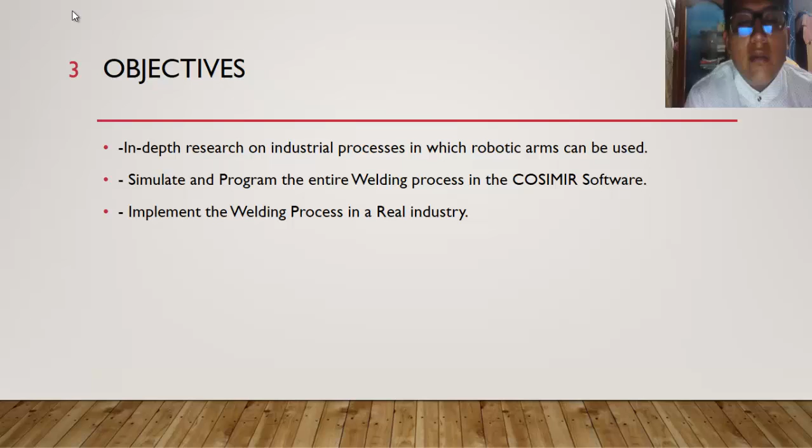Introduction. The welding processes in the automotive industry are constantly evolving from manual welding to automatic welding, that is from the first industry to the current industry, or Industry 4.0, as it is now, due to the evolution of production systems on the basis of a competitive environment and the economic and social development of industrial organization worldwide.

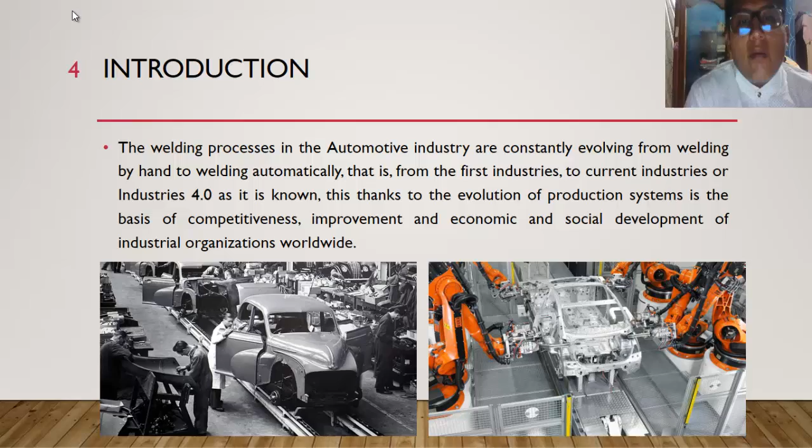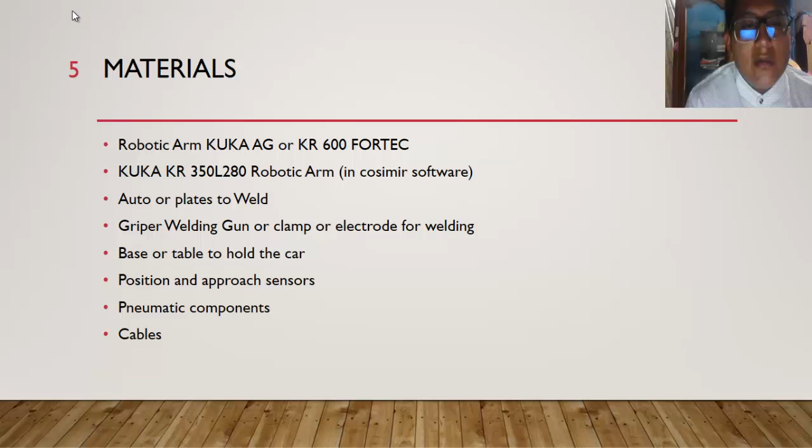The materials. The robots are KUKA AG, or KR 600 FORTEC, KUKA KR 350 L280 robots in Cosimir software. In this case, we use the KUKA robots to weld, a gripper welding gun or clamp or electrode for welding, a base or table to hold the car, position and approach sensors, pneumatic components, cables.

Theoretical framework. The KR 600 FORTEC. The advantages of the KR 600 FORTEC heavy-duty robots are obvious: powerful and intelligent technology guarantees consistently high production quality without extensive maintenance effort. Compared to previous models, the KR 600 FORTEC stands out with an even slimmer design. The design allows you to lift heavy components up to 600 kilograms in a minimum space.

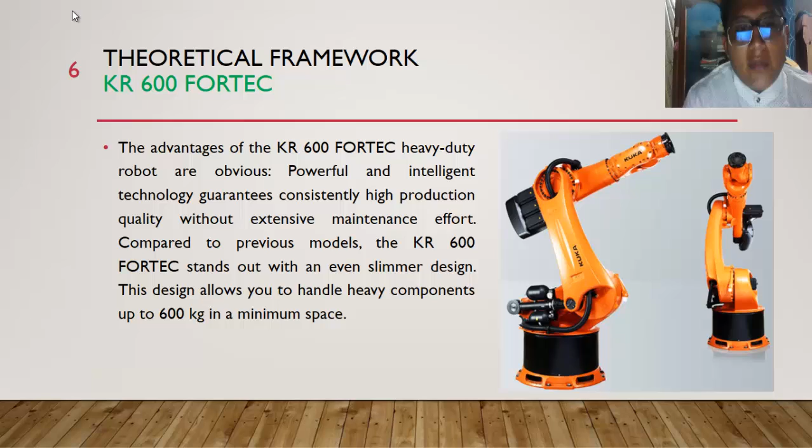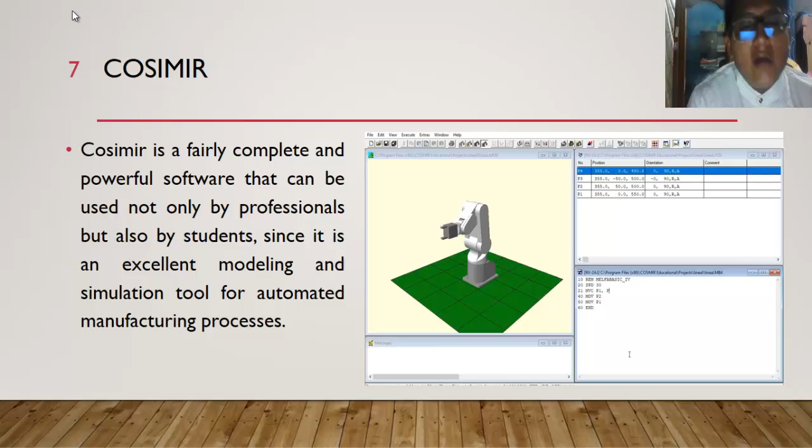The Cosimir software. The Cosimir software is a fairly complete and powerful software that can be used not only by professionals but also by students. Cosimir is an excellent modeling and simulation tool for automatic manufacturing processes.

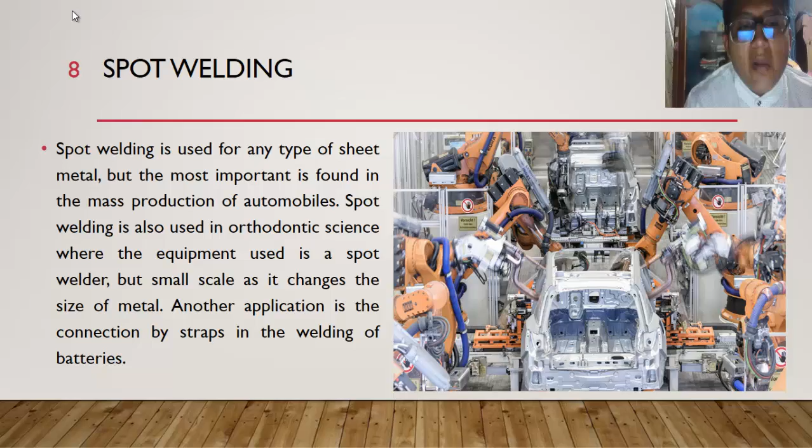Spot welding. Spot welding is used for any type of sheet metal, but the most important use is found in the mass production of automobiles. Spot welding is also used in orthodontics, where the equipment used is a spot welder, but on a small scale, changing the size of metal. Another application is the connection by strap in the welding of batteries.

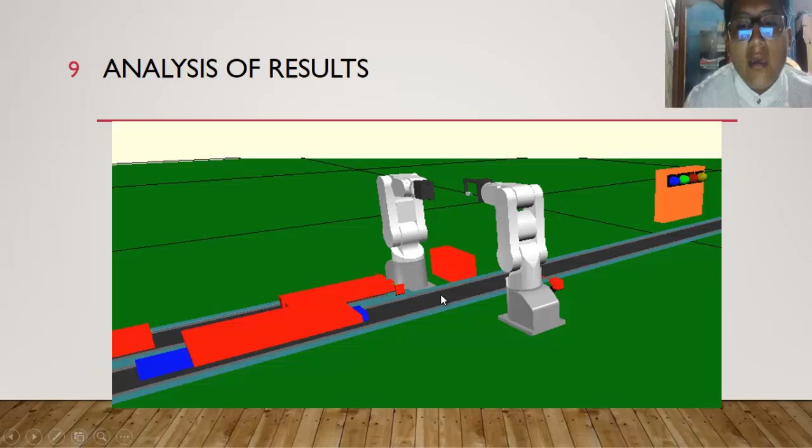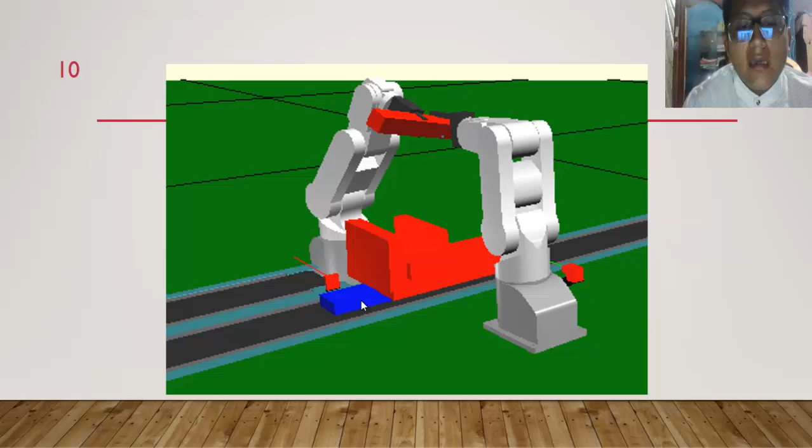Okay, analysis of results. We can observe the correct operation of the conveyor belt when it carries the material to the sensors, to later be manipulated by the first robotic arm. Okay, in this picture, here you can see the synchronized movement of the arm in charge of placing the device prior to welding.

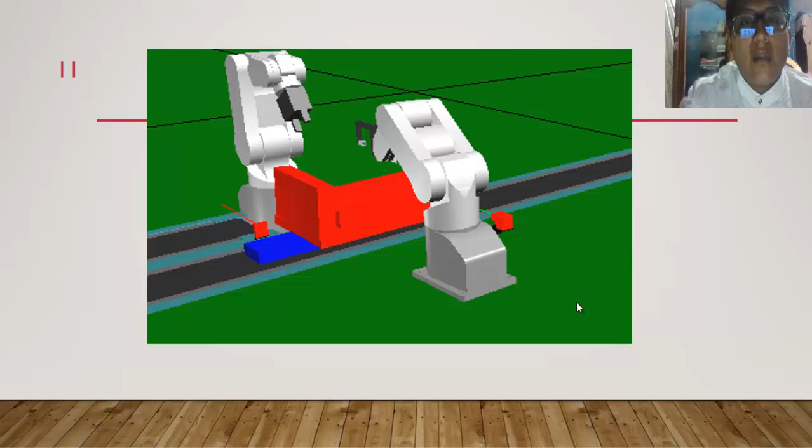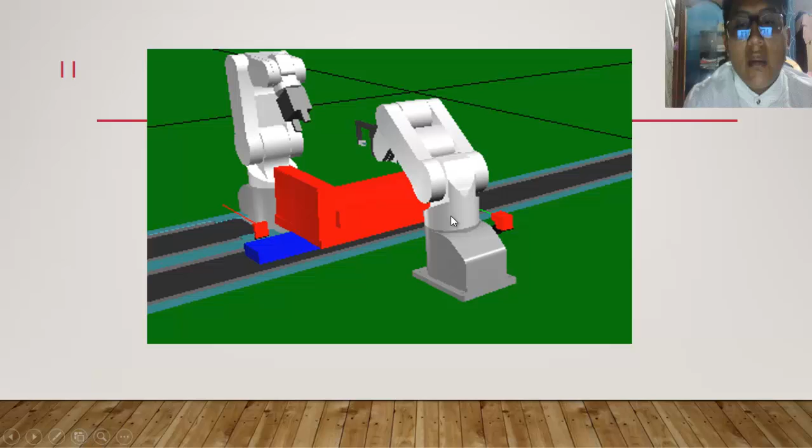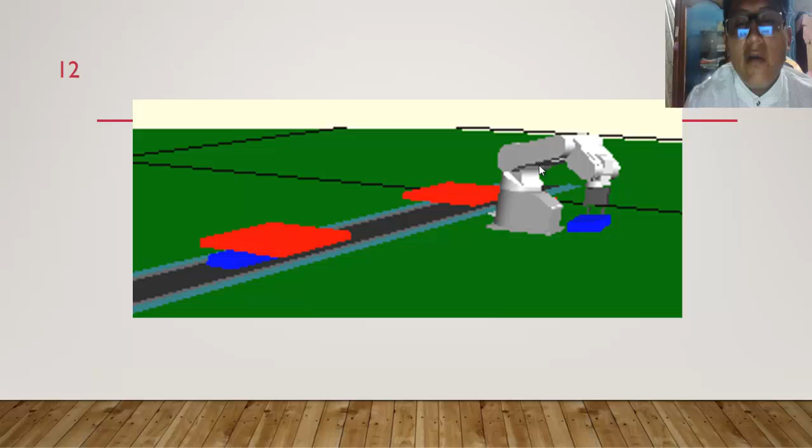Okay. We can see how the second arm performs the function of welding the parts. The process will be done twice. Finally, we observe that the conveyor drives the final product to another sensor, which detects it, and the third arm proceeds to remove the final product. The latter may be taken to a possible different process. Process completed.

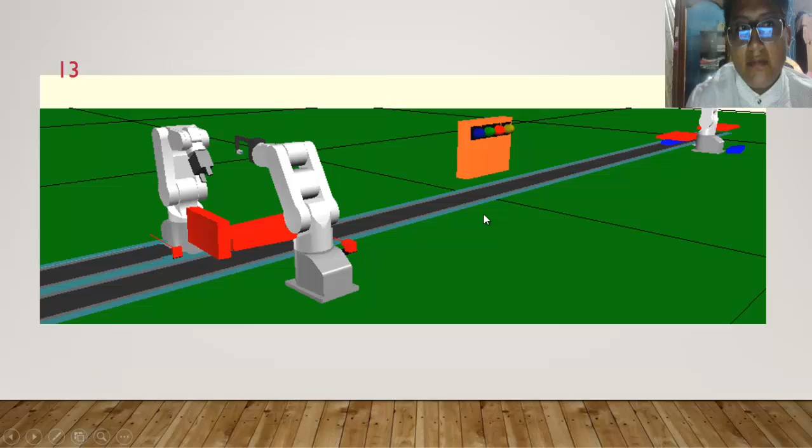Another problem was when building or designing the process in Cosimir, placing all the objects in different ways to be able to manipulate them in the software without risk of collision. Okay, in here.

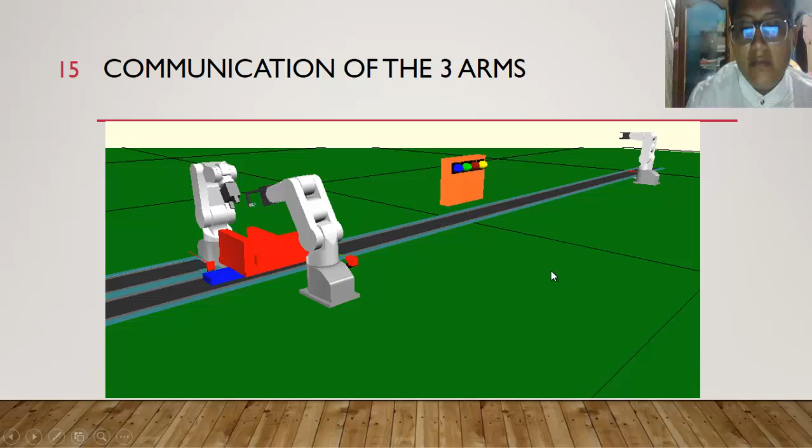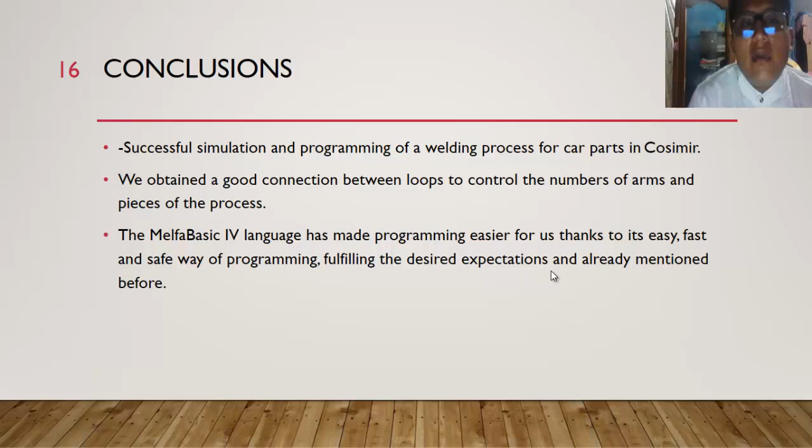Conclusion. Successful simulation and programming of a welding process for car parts in Cosimir. We obtained a good connection between loose projects to control the number of arms and pieces of the process. The MelfaBasic IV language has made programming easy thanks to its easy, fast and safe way of programming. fulfilling the desired expectations and already mentioned before. And references.

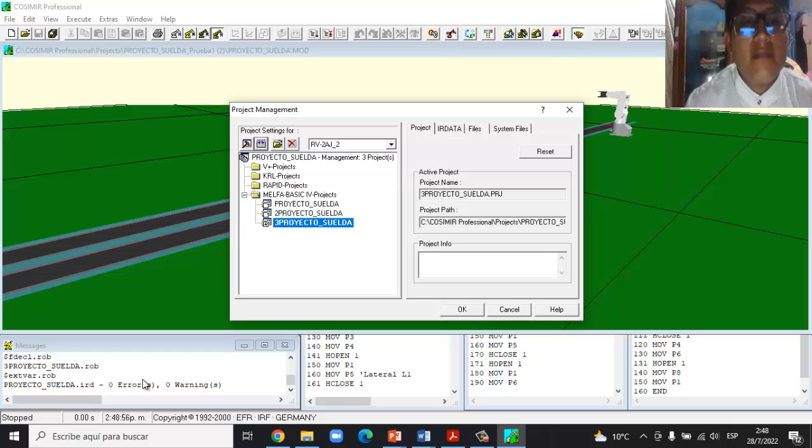Okay. Next, the simulation of the whole process. Okay, the simulation of the whole process. One arm, PROYECTO_SUELDA, compile: 0 errors, 0 warnings. Two arms, 2PROYECTO_SUELDA, compile: 0 errors, 0 warnings. Three arms, 3PROYECTO_SUELDA, compile: 0 errors, 0 warnings.

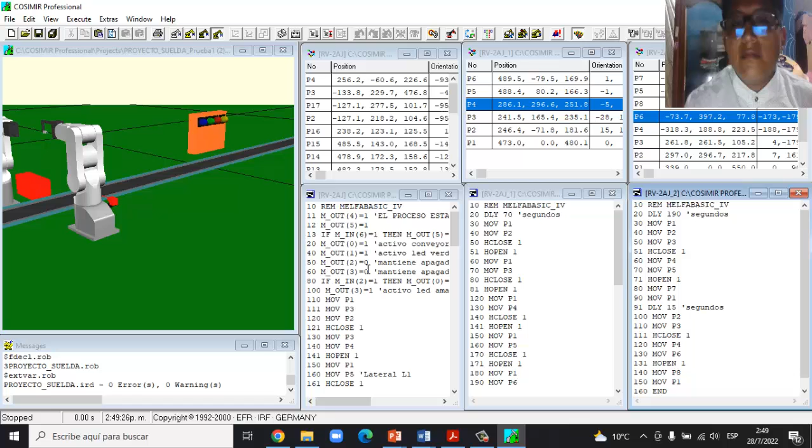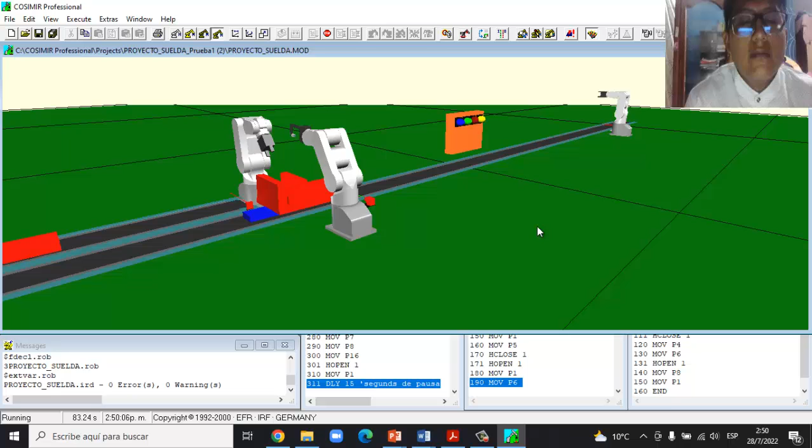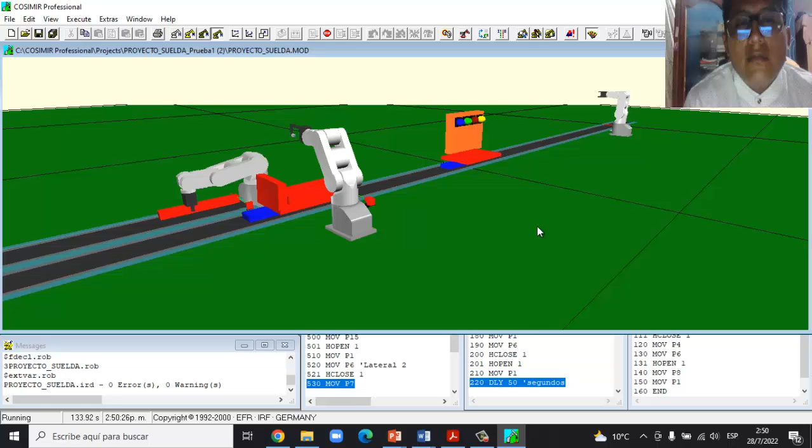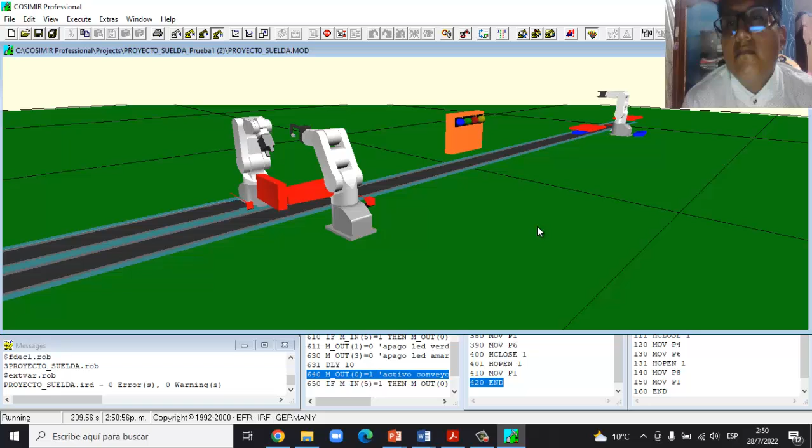Okay. These positions. This position two arm, this position three arm. I'm programming the arms. Okay. The simulation. Start. And LED indication. Welding. And remember the process. Remove the piece and wind. And the next process. Process with your arms. Okay, finish. Finish process of simulation.